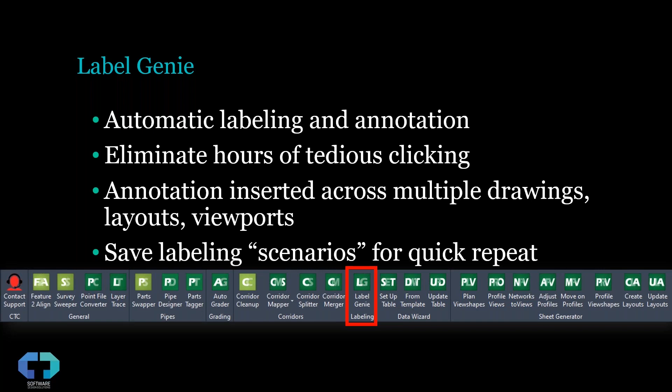You can even save different labeling scenarios out to templates so you can quickly repeat those things, right? So a certain set of hatches that you always apply MText to, maybe line and curve labels or surface spot labels that you always attach to certain surfaces or feature lines or polylines, you name it. We can save all of that into templates for quick repeat.

Another tool called Data Wizard. This allows you to create project-specific legends or QTOs. So a lot of times we're dragging in kind of a one-size-fits-all or just kind of a canned legend, and then we take the time to manually trim those up to make them work, or we just leave that in there and we have a legend that doesn't accurately represent all of our sheets.

With Data Wizard, we can scan multiple drawings at once, or even just limit it to one sheet or viewport and automatically generate a legend for that. It'll account for AutoCAD and Civil 3D objects, and much like Label Genie, you can save templates so you can quickly repeat these different legend types. Whether you're doing sheet-specific legends or one project-wide legend, Data Wizard will handle it.

And the same workflow works great for project-wide QTO. You want to count up multiple different objects across multiple different drawings and then export to Excel. Data Wizard will do that as well.

And the third tool I want to talk about is called Sheet Generator. It's about creating plan and profile sheets. Similar to the native tool set, you might be familiar with it. They're called view frames. And while those are handy to create plan and profile sheets, the big limitation with them is as soon as you create them, they're not dynamic to your project, right?

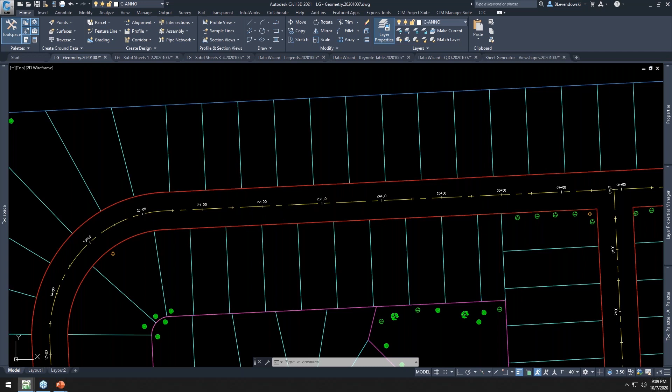And normally we're picking and clicking away on all this stuff, and then things shift or change and we have to do it. So let me show you that first example of that with Label Genie. So here's that CIM Project Suite I mentioned. If I click on Label Genie, it launches an easy to use interface.

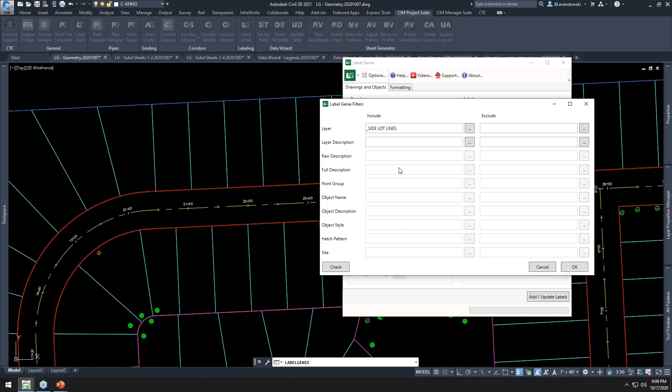I'm going to choose the current drawing. I'm going to label line and curve labels. I'm going to anchor them to polylines, and specifically I'm going to anchor them to polylines on this layer. Okay, I chose those side lot lines, those cyan lines. And so I can reference a set of polylines, many different object types, by layer, by style, by name, and it's going to insert line and curve labels across all of these at once.

With segments, I'm going to do both lines and curves. And then finally on the formatting tab, what styles do I want to choose? These read right from my drawing. Okay, so we're not going to create any kind of proprietary label objects or anything like that with this tool set or any of the tools in the CIM Project Suite. It reads your templates, your styles, your layers, and so on.

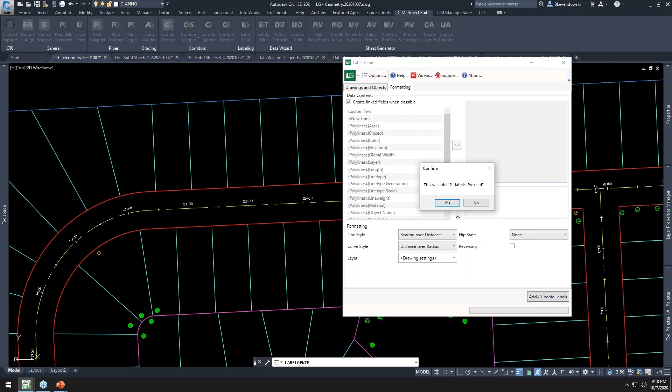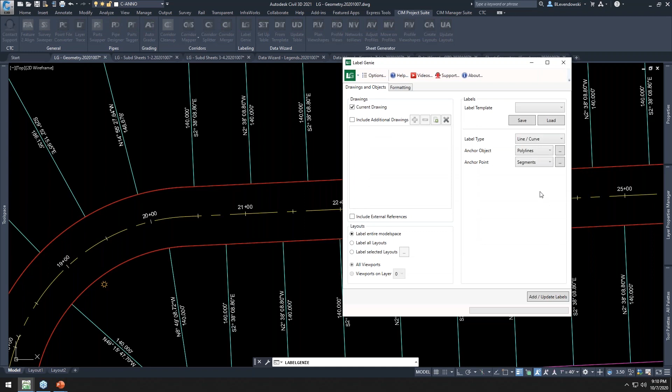So I'll click Add. It's going to give me a confirmation, 121 labels. I'll say yes, and boom, they all come in. Okay. Now you've got different labeling scenarios. Perhaps along the right-of-way, we want to use a different label style. Just grab whatever layer those objects are on, change your style. Let's say you want it to be distance, and then click Add. And all those labels come in automatically as well.

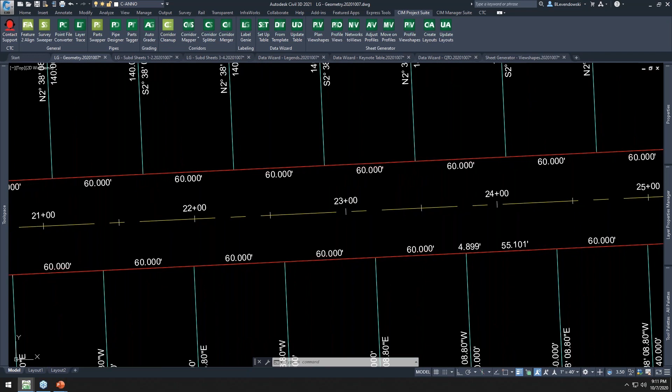Now perhaps you wanted them on the other side, right? This is the beauty of Label Genie. If your design changes, if the labels that you just created don't look quite right, or they need to shift around, or you want to change a style or a setting on them, Label Genie doesn't just create labels, it updates them as well. So I can control the flip state, for example. I'm going to flip all of these like this, but you see there's other examples about flipping towards and away from the centroid.

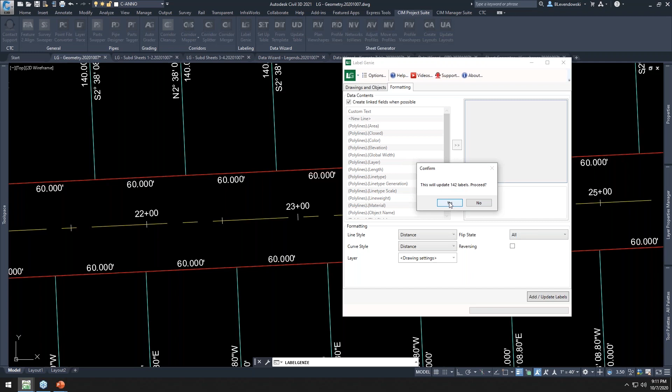I'm going to hit Add. It's going to find 142 labels. This time it's going to update them. I'll hit yes, and now all of those flip to the other side. Okay. With Label Genie, there's tons of different things we can label. Let me take something totally different like assemblies. There's no assembly labels. It's nice to keep these straight with little labels on them, but there's really no way to do that. And so Label Genie will handle this as well.

Let's grab MText, assemblies, but notice all the other anchor objects we can choose here. AutoCAD and Civil 3D object types. And in fact, we've got a big update to Label Genie coming out. This list of anchor objects is going to be doubled so that just about any anchor object you can think of will be in here. I'm going to anchor MText to assemblies. Then I can choose what information to read from those assemblies. I'm going to take the assembly name.

We don't need to make it annotative. We'll make the height 0.2. Choose a display width of 5. And then all kinds of offset options. We'll do a vertical offset of -3. And we can turn the background mask off. But it's MText, so a lot of those properties that you are concerned with show up here. What layers they're going to land on, the orientation, all those kinds of things. I'm showing you one example here with assemblies, but you can do it for all sorts of things.

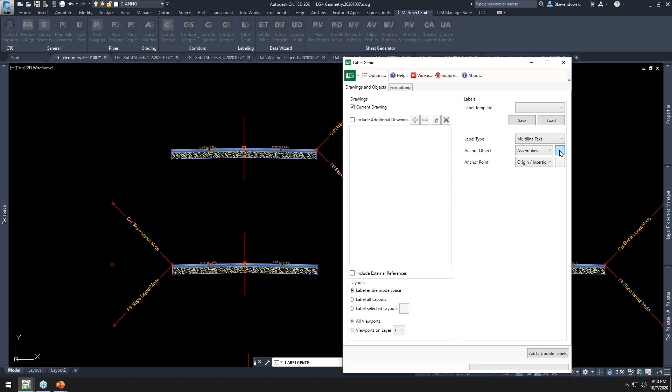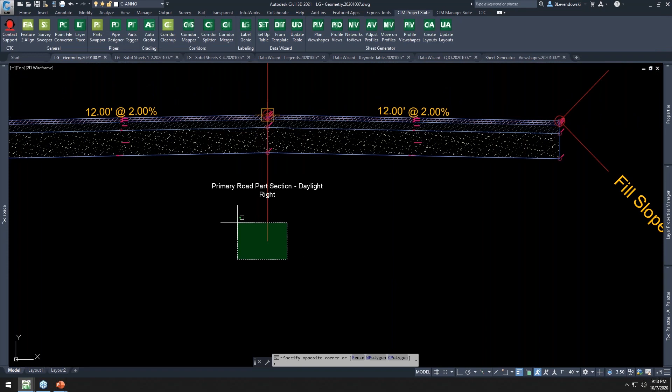I think I've got a layer filter on here. Yep, let's turn that off. Notice it told me there's nothing to label. It's because I was looking for a layer that assemblies weren't on. There we go, 8 labels at once. Boom, everything comes in. This is making MText with embedded AutoCAD fields in it, so it's dynamic. So as the name of that assembly changes, that label itself will change. If this is a different piece of text in there, simply refresh and the labels update. So many areas like this all across your drawings.

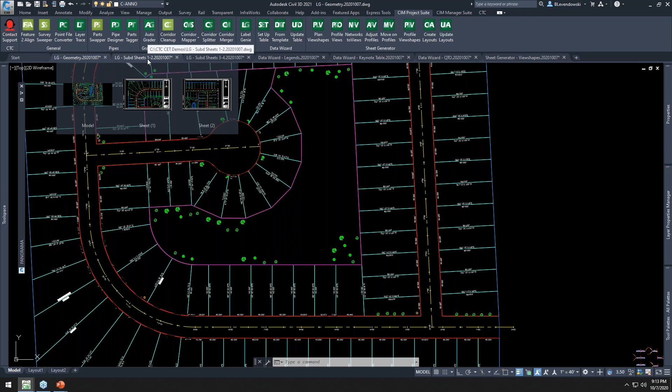Let's look at another example. And let's make it more complicated this time. I want to label 2 drawings at once, and in each of those drawings I have multiple layouts, and I want to label per those layouts. Furthermore, some of my information in these layouts, in these sheets, doesn't live in this drawing, but it's coming through in data shortcuts or in XREFs. This is how a sheet would normally be set up, right? You've got information coming in from multiple drawings.

So you can label in base files or model files like this, or you can go into sheet files and label objects that are brought in through XREF or data shortcut. This is a grading plan. We're going to take that same project scenario and we want to add surface spot elevations and slope labels.

So I'm going to run Label Genie again. This time we're going to choose the current drawing, and we're going to choose an additional drawing. We'll browse out to it. It'll be this one right here, this other drawing I have open, in fact.

Okay, we want to include the XREFs now. And instead of labeling all of model space, we're going to label layouts. We could do all layouts, or we could limit them to the layouts that exist in those drawings. So lots of detailed control on this.

Many drawings and layouts can be incorporated at once. I'm doing a couple here. We're going to have 4 different layouts, right? But what about those long transportation projects? You might have 50 or 60 layouts. You can do all of that at once with this tool.

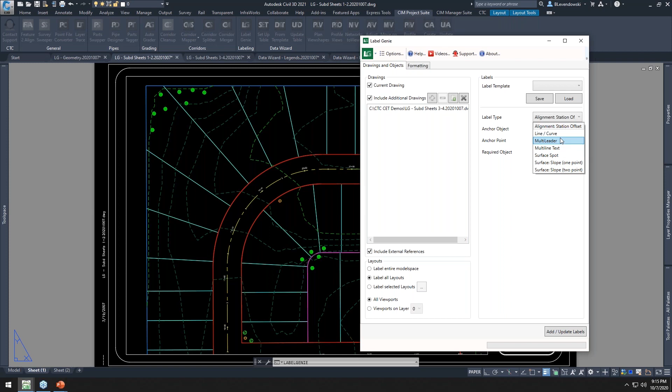Okay, we're looking at surface spot elevation labels, but again, look at all these different label types we can add. With that update I mentioned, we've got a lot more label types coming out soon.

We're going to attach these to feature lines, and we're going to put these on feature lines of a certain layer. Say you don't know the exact layer name, you can put asterisks before and after and just say grab me layers with the word lots in it.

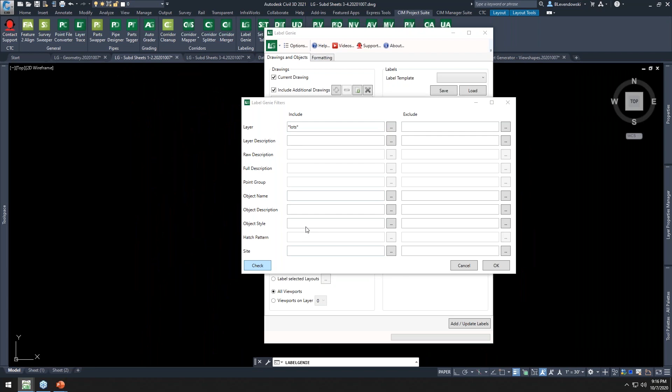And I can even click the check button, and it'll check in my source drawings. Did it find those objects? Yes, 122 feature lines in each drawing.

Okay, we're going to anchor this to the vertices of these feature lines. We're going to do it to all the points except the midpoints here.

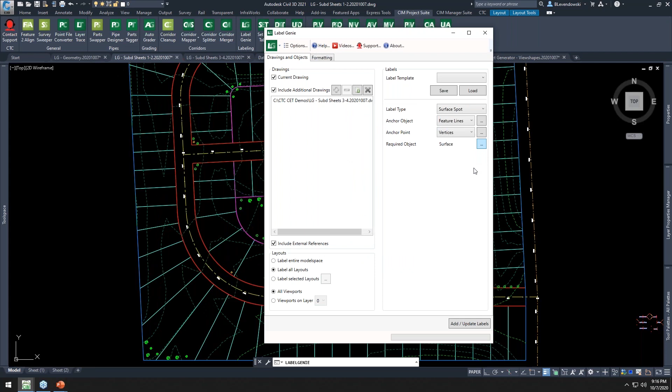Now these are surface spot elevations, so they need a surface from which to read elevations. Well, instead of doing layer filtering, I can do object name filtering and say grab whatever surface has the text FG or finish grade in it.

And then on the formatting tab here, these are just surface spot elevations, so there's no data contents up here to work with, but I do have my styles to choose. So I'll go ahead and choose that and hit Add Update Labels.

It's going to scan through those 2 drawings and layouts and figure out what should be created. Turns out it's 519 labels. Do I want to proceed? I'll say yes to this.

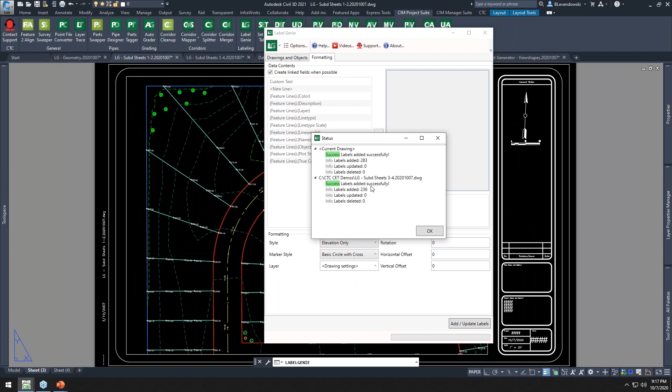So these are surface spots. Think about the work involved to do this, right? You would be clicking 519 times to insert every one of those in each and every drawing. And we just did it at once across 4 layouts and 2 drawings at once.

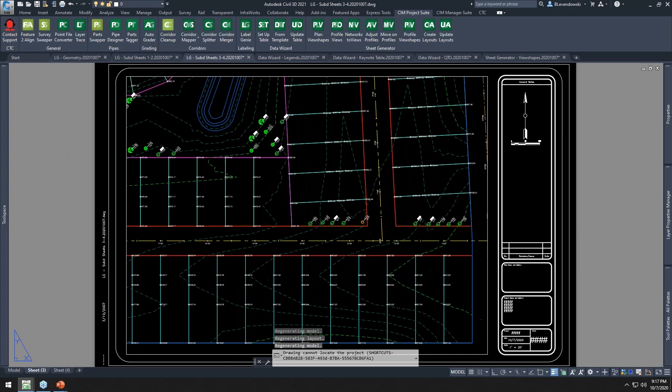I said it was per layout, right? So in this drawing, here's the whole project, but it was only reading the viewports on these 2 layouts. That's why you see only this upper half labeled. Now, if I jump to this other drawing, notice all of these are labeled, and it was the bottom half of the project.

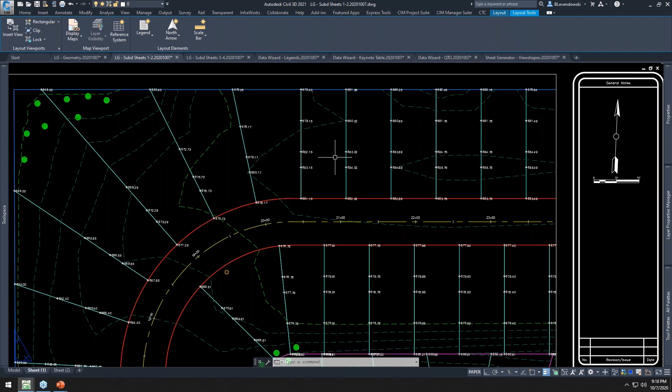Now, like I'd shown you with the line and curve labels, everything is dynamic. Say the grading plan changes, and the high and low points along these lot lines need to shift, you simply run it again. Maybe the appearance or the style on those labels aren't what you want.

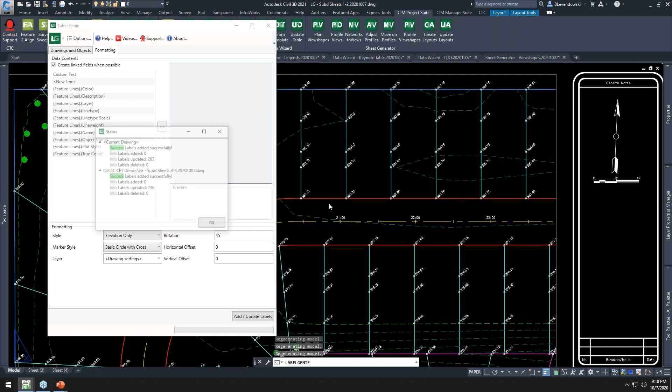Like maybe we want a rotation on this, 45 degrees. Click Add. It remembered my previous settings, so all I have to do is change the rotation value, and now it's going to update 519 labels. And all of those have a rotation on them now.

Okay, we'll do one other thing with Label Genie, and then we'll move on to another tool, and that is to label surface slope labels. We're going to attach them to those same feature lines, to segments, and then we're going to do a percent label. So we want slope labels on all of these grade segments in our lot lines.

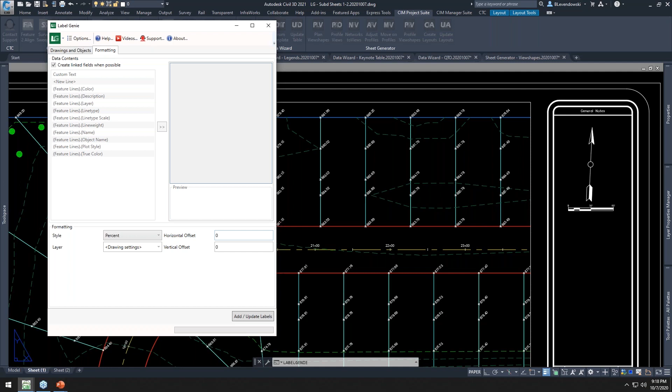I'm going to click Add. 463 labels. We'll click Yes to that, and then we'll see those slope labels come in as well.

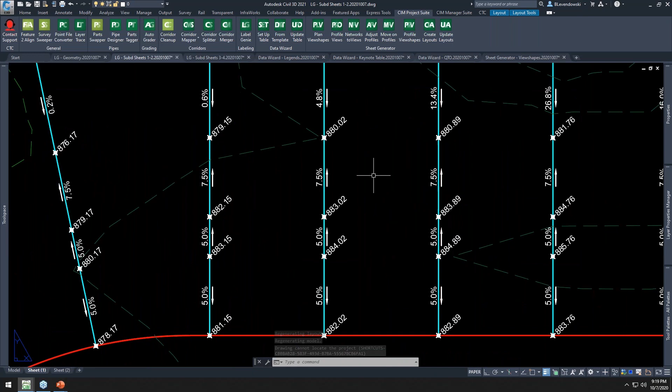Okay, so different slope labels. Same thing again, right? Picking and clicking on each and every one of those. I just did what would probably be an hour's worth of work, 2 hours worth of work. I did it in about 5 minutes. And I was talking you through it, so.

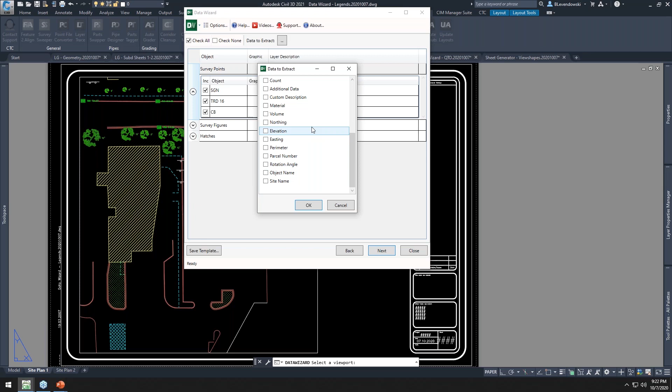But I can pull all kinds of other information out of these objects, QTO information, any kind of tabulations you might want to do. There's about half a dozen different ways to tabulate things in Civil 3D, and none of them do a good job. And none of them do more than just maybe about 10% of the object types that exist in the software. This will do all of it at once and just about any information you want from the object. So legends and QTO are a big focus, a common use for this, but any kind of tabulation you might want to do. I have a lot of customers that do tree tabulations with blocks, all kinds of different things.

If I click next, here is the formatting options. What kind of capitalization? What are the size of the cells in the table I'm about to create? What about the title, the headers, all that stuff? I have control over it.

And then finally, I can write this to Excel or I can write it to an AutoCAD table. In this case, I want a legend in the drawing, so I'm going to do an AutoCAD table and choose my style.

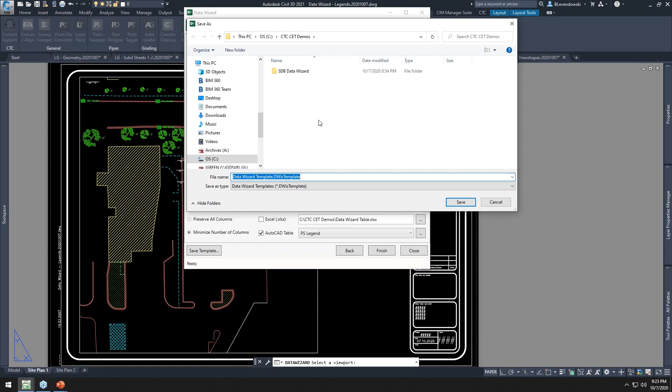Now you may have noticed as I've been going through this, there's a Save Template button down here. What this means is that at any point I can save out a Data Wizard template, and then I can reload that in a different drawing, a different project, and all those settings that I've specified throughout this wizard will all be saved to it, so I can launch it again and create a legend based on these settings, but relative to that drawing or that project.

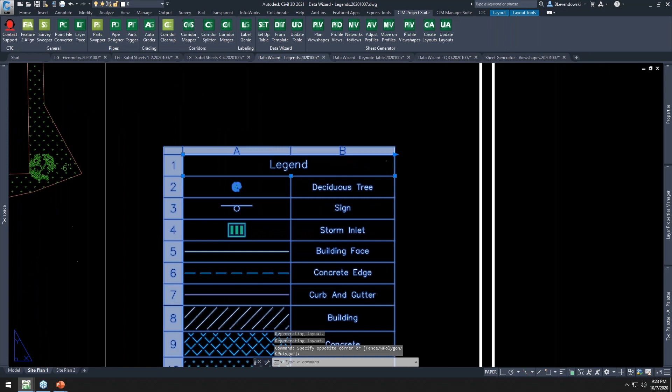So let's click Finish here. We'll create this. I mentioned earlier, none of these tools in the CIM Project Suite create proprietary objects. Same goes right here. This is a native AutoCAD table, yet we've automated the populating of block symbology inside this column. We're reading, in this case, the layer descriptions from these objects, okay?

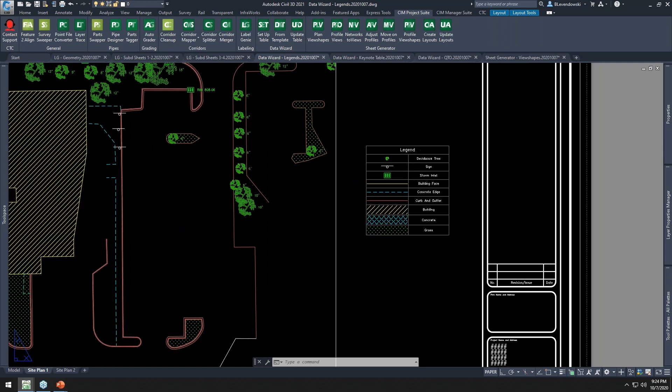And this stuff is relatively dynamic, meaning if something changes in my drawing, let's go ahead and do that one. So let's change, just simply freeze a layer. Okay, I froze the grass layer. And now let's actually make a change to the curb and gutter layer.

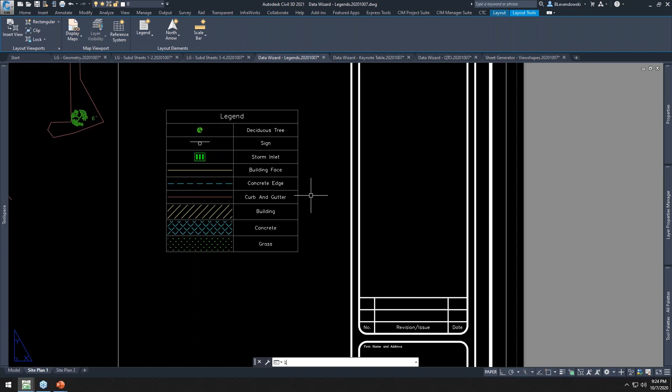So I read this from the layer description, from this layer right here. And maybe there was, I just want to notate it a little bit different. Maybe it's concrete, curb and gutter, or whatever the case may be, okay?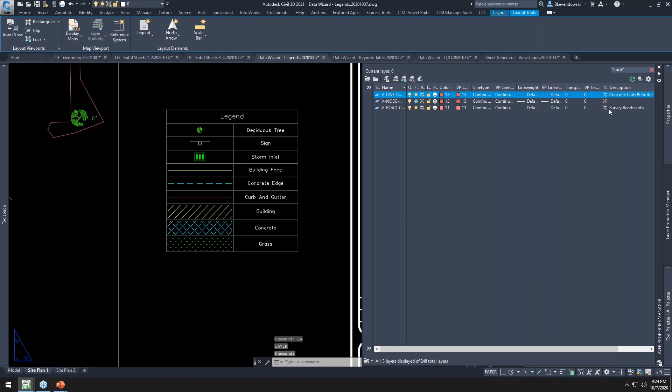Any of those changes you make in your drawing, you simply come back to Data Wizard, run the update table command, pick on your table. We're going to read, write this out to the same AutoCAD table, and we're going to read the settings from the table. So I'm going to hit OK, and you're going to watch as this table changes here.

Okay, there's a new layer description. The grass hatching is gone now. And notice this symbology, everything's to scale—the hatch scaling, the line type scaling, the storm inlets here. Now the tree sizes vary here, so this is taking the default size from the point style, but you get the idea.

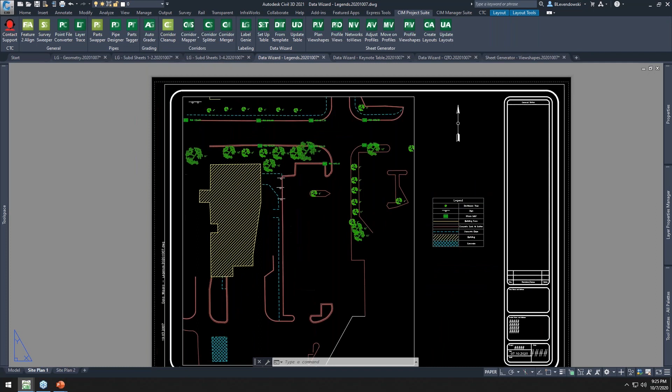Let's look at another scenario. What can we scan for? There's just about every object type in there I've shown you. Think about M leaders you're using as callouts - attributed blocks embedded in your M leaders are a great tool for callouts like this.

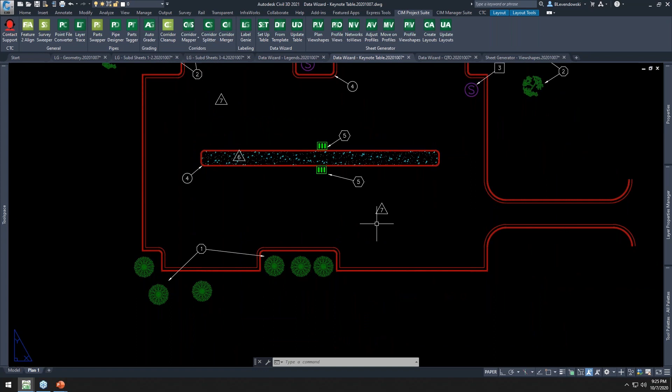A lot of times we want to tabulate the stuff, and in fact in these M leaders we often have descriptions or information about what that object is. If you have all these across your drawing, or maybe you haven't found a great way to tabulate them, you can make keynote tables if that's a common thing for you. Let me show you that.

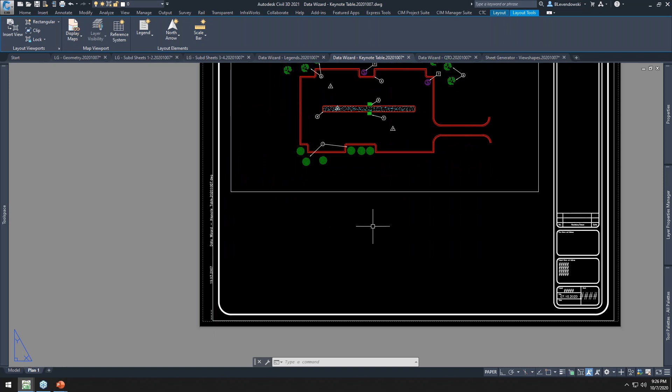I'll run Data Wizard. It works the same way as Legends. I'm going to use this layout, and we're going to choose this viewport. Choosing the viewport not only limits what objects will show up in the legend or table, but it'll also make sure the symbology is scaled to match that viewport.

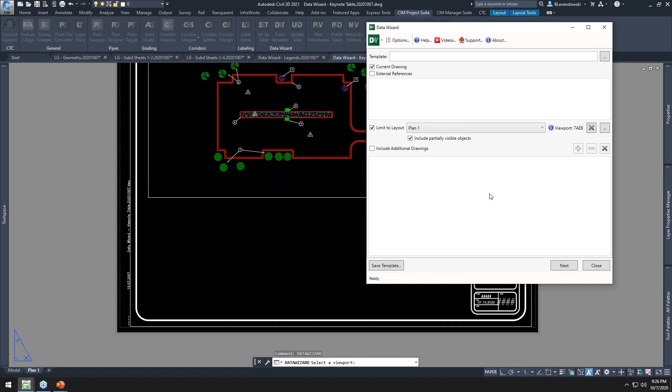I'm going to look for multi-leaders, and in this case I'm going to scan for the graphic - that's just the symbol you see there. And then, as you might have noticed earlier, there's an additional data option in there - that's custom attribute information you might have in your objects.

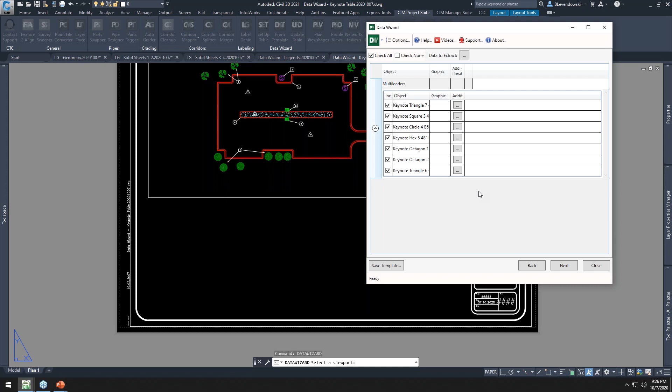I said these were attributed blocks. If I jump into here, it's picking up on those custom attributes I have in those multi-leaders. Now this would work for standard blocks or attributed block multi-leaders, and I can choose information from those attributes to be included in my table.

I could use Civil 3D user-defined properties, GIS object data, or Civil 3D property sets. Basically any information you might have in your drawings, we can read it, we can tabulate it, do anything you need with it. So I'm going to hit next.

On this final screen, we've got formatting options again in here. I didn't mention before, there's sorting options too. And what we're going to do is create a table. Here's a final preview with those descriptions - they're going to come through.

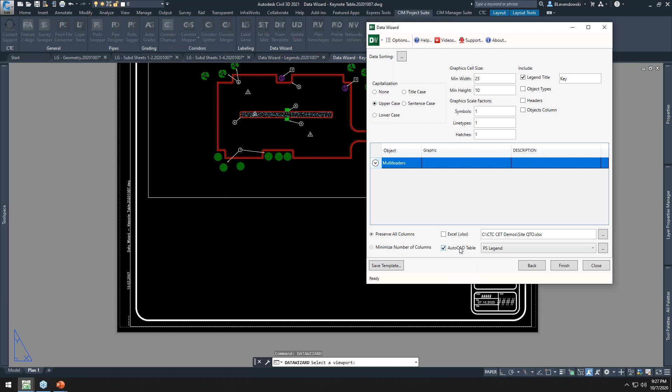We're going to write this out to an AutoCAD table again. I'll hit finish, and we'll drop that right down here. All that symbology comes in to scale.

Whatever standards you have - layer descriptions, your styles for M leaders - Data Wizard will read and use all of that stuff. These are not styles that you have to use. I've got examples set up for this demonstration, but it'll work with any and all of your styles.

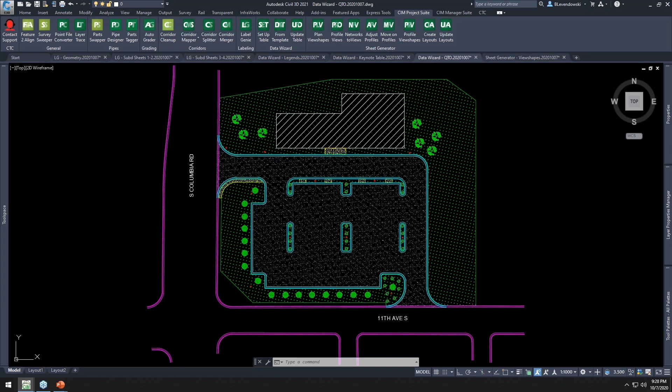This is a table style. If you want borders to show up a different way, or you don't want borders, turn it off in your table style, no problem. I mentioned the QTO - this isn't so much a sheet production thing, but it's obviously a part of the project, and I thought I'd highlight that as well. Here's a simple site plan where we want to count up a variety of blocks.

We have some feature lines for curb, and we've got hatching for seating, for pavement, a variety of things. If I run this again, I'm going to scan the entire drawing, and we're going to grab those blocks, feature lines, and hatches out of here.

I hit next, and here I've got some of that quantity information turned on. So in this data to extract option here, I've got areas, lengths, and count, and that information is showing up here.

Now this is adding up or summarizing all this data, right? So shrubs, we've got 26 of them. But there are options in here for whether you want to summarize or combine items like this, or if you want to separate them - list each entity, like listing each object with the northing and easting of it, for example. We can do separate items like this with a summary or without.

Just as an example, I'll show you what that looks like. In the blocks here, now that shrub row where it says 26, I can expand that, and my table can list each and every shrub itself. A lot of different workflows for that, but I just want to highlight that with Data Wizard we can summarize, or we can list individually all the objects we're finding - summarize or combine, different ways to term it.

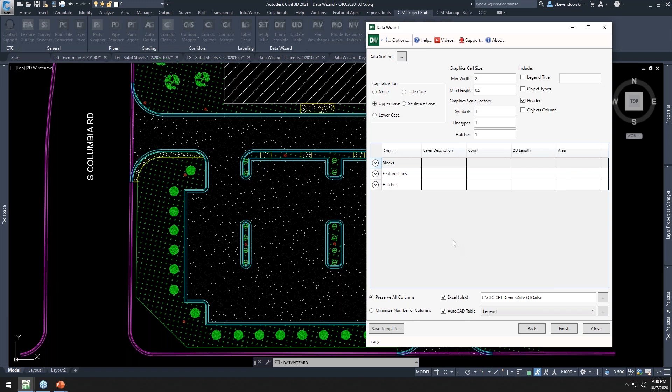We want a QTO, so we want one entry for all the shrubs. And then finally, we're going to write this out to an Excel spreadsheet. Hit finish, it's going to open up Excel for us. Here is that QTO - the count, the lengths, the areas for all those different object types.

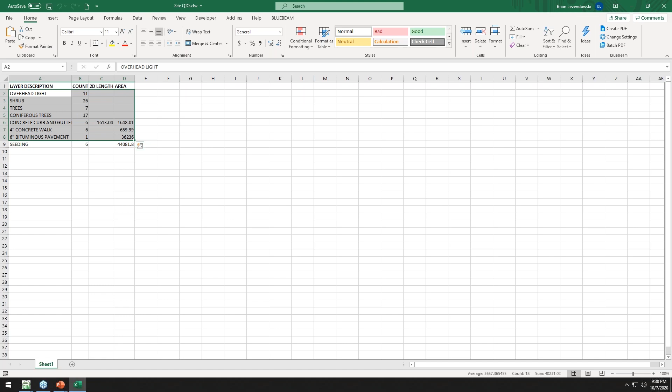I did that on one drawing. You could do it across a dozen drawings at once - count everything up at once, get QTOs really quickly, really easily that way.

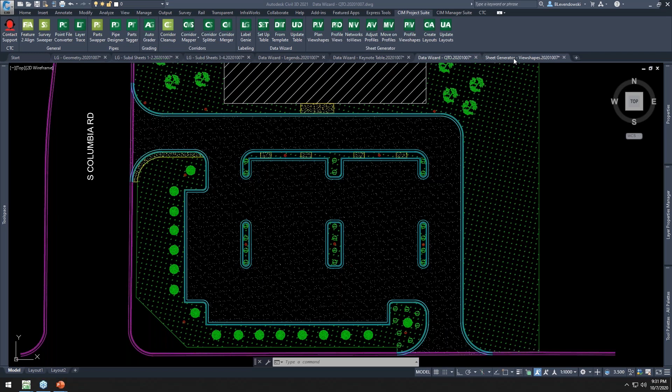The last tool I want to talk to you about is Sheet Generator, and this deals with plan and profile sheets. Now, I mentioned in the intro the ViewFrames toolset. This is a native toolset that will create plan and profile sheets for you, make the layouts, viewports, and all that kind of thing. But there's this big limitation, as I said, which is when your project changes, there's no way to update those sheets.

You just have to delete them again, or you have to manually go update all those viewports, those north arrows on your own. This does one of two things: it wastes a lot of time for us, or it forces us to lock in and stay married to a sheet layout, when it would be really nice if at any point we could simply shift our sheet layout based on any changes in our alignment or the project, or just preferences on how we want to show those sheets.

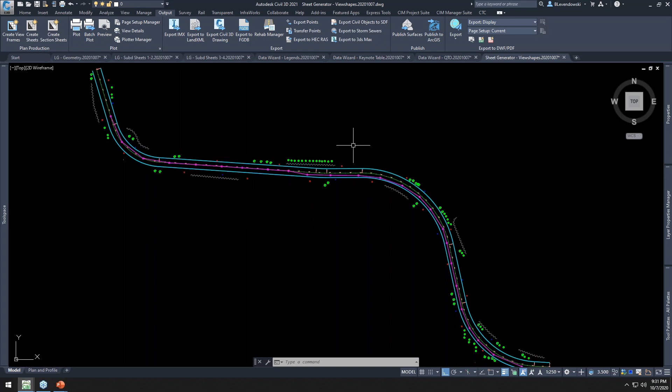So what we did is we created a whole module-based tool set that not only fully replaces the native tool set, but allows you to, at the end, also update those layouts when projects change. So I'm going to walk you through this. There's a lot of different modules to it, so I'm not going to touch on every little setting here, but you'll get the idea of how this works.

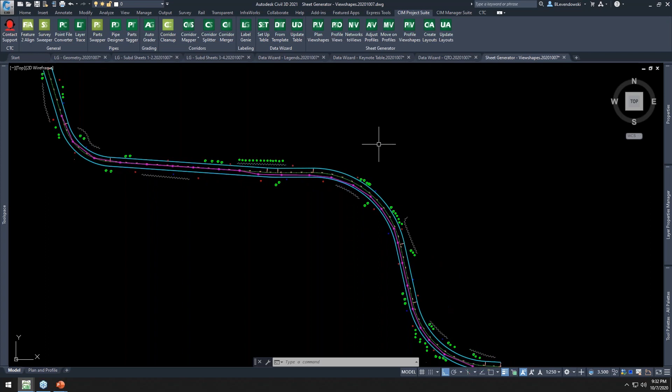I'm going to run plan view shapes. View shapes are what lays out in plan view here, which is going to represent each one of our viewports. Let's choose a starting stationing. Go right here. I'm going to specify a distance between match lines. Notice it tells me the maximum distance. This is based on the size of my, let me back up here, the size of my sheet itself. This is my sheet template.

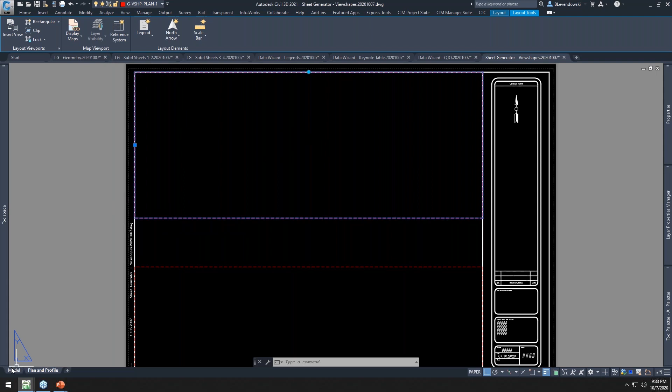How Sheet Generator works is it reads a rectangular block on your sheet template. That's the only requirement for Sheet Generator, that you place one of these simple blocks on here. When we have that, we know how much we can fit on your sheet. We take that block and lay it out along our alignment here. Based on that size, as well as my drawing scale, I know what kind of distance I have between match lines. We can tell it to align or avoid alignment vertices like PCs or PTs that are within 5 meters. I'm going to hit finish.

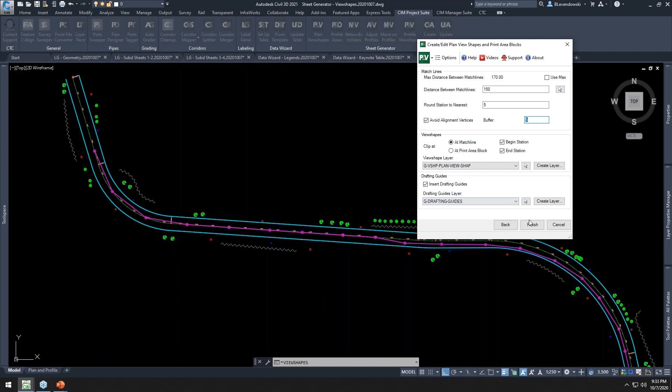Now it lays out all those sheets, okay? Now, if that doesn't look the way you want, you can simply run it again. There was a station shift, it needed to go back like that. Click next, finish, watch this whole thing shift, okay? Shifted it back by 20, 30 meters.

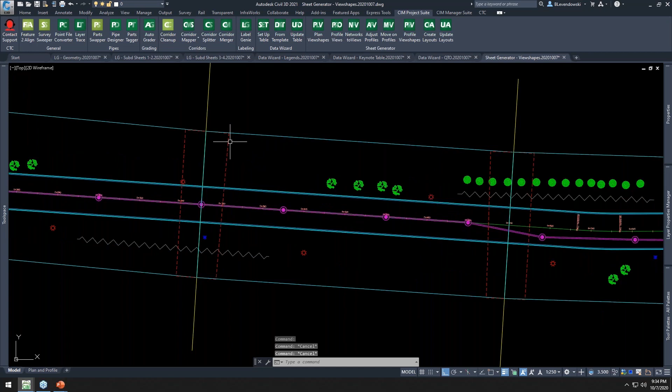These are polylines. This is what our viewports are going to be. This red rectangle is that one I just showed you right on your sheet template, okay? And then these are pseudo match lines, so to speak. The match lines that will actually be created will show up on your sheet. But because these are just polylines and blocks, I can move them around as I see fit. Any kind of little tweaking I might want to do to a particular layout I can do.

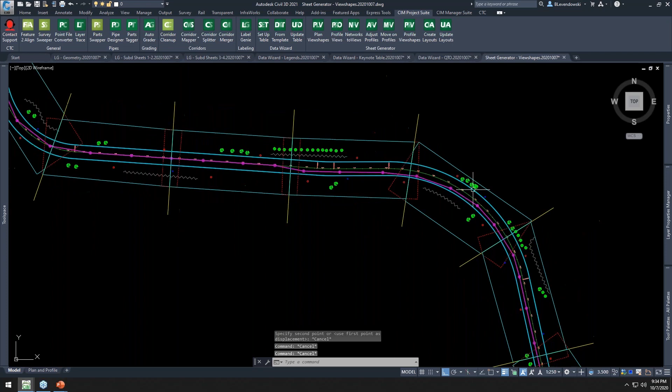Next, we move on to the profile views. This we actually use the native tool set to do. So I'm not going to walk through that, but I'm just going to create my profile views. And then we provide tools to allow you to edit en masse all your profile views at once and basically massage them to look the way you want.

This is actually one of the big complaints about the native tool set, that there isn't enough control on how your profile views look. It's a big limitation. In fact, it's what drives many people to not even bother with the tool set. With Sheet Generator, you have tons of control on this, and I'll show you how right here.

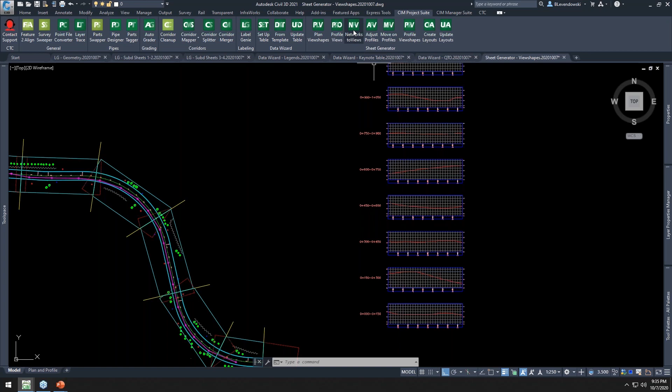Let's run the networks to views command. Let's push all of our pipe networks to all these profile views at once. We like to do this in this tool set because it only adds the pipes and structures that show up within that profile view station and elevation range. Just these few pipes. Makes a big difference with drawing performance, in fact.

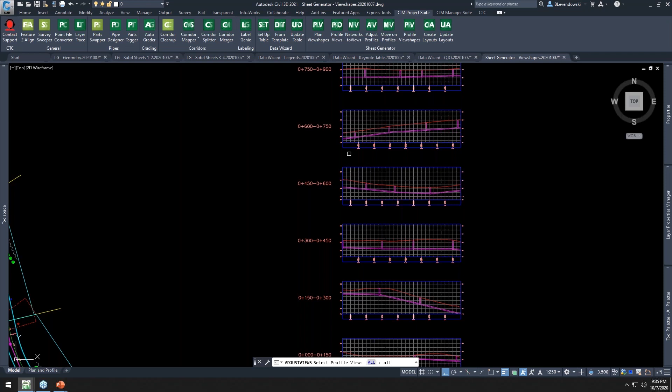Okay, now that we have some of our data in our profile views, I can run adjust profiles. And there's a variety of things I can do. I'm going to grab all my views, we'll load them into here. First thing we want to do, of course, is align the stationing with the plan views. I choose the layer that those plan views are on. And then we have other options here.

What if you wanted to add a 5-meter buffer on each profile view such that it overlapped that 5 meters from one profile view to the next? There's no way to do this natively. You can do it in here easily.

And then the control of your profile view height range or the elevation range, there's really detailed control on this. First of all, I can round the range to match the major ticks or the grid lines in my profile view style. So I don't get this kind of half grid thing right here, right? Like a quarter grid. We can make sure it rounds to the nearest one.

And then I can read different objects in each and every profile and then center it on the median or the highest or the lowest elevation of those objects. I can specify a standard profile view height. We'll do 20 meters in this case. And I could even do a delta up or down, maybe to accommodate for some really deep sanitary sewer manholes or something like that.

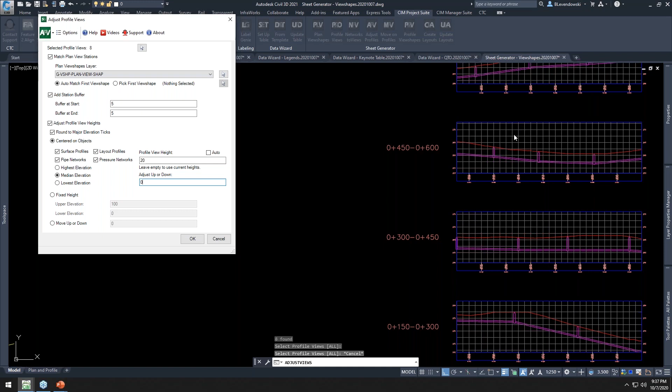I'm going to hit OK to this. And all this tool does, again, is it edits our profile views, but it does a ton of things all at once that would normally be really tedious. You'd have to do one view at a time. So I'm going to hit OK. You'll see these stations change. You'll see everything shift around. Okay, a really quick change there.

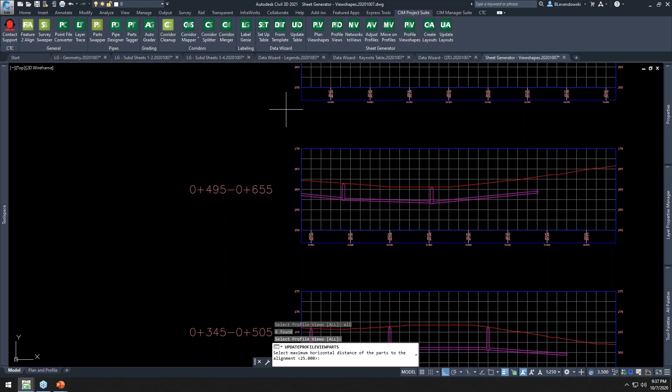Now that was quite the shift to match our plan views. So perhaps there's a pipe or structure that should show up here. This is why we made this a module-based tool set, because I can just run networks to views again, and then all those pipes and structures come in.

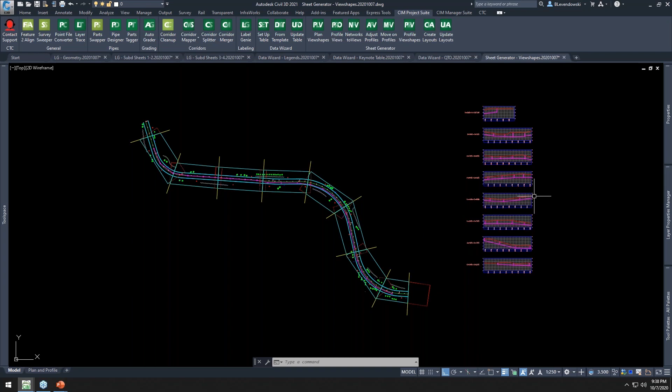Okay. The other thing you'll notice about Sheet Generator is that I get all my profile views and plan views at once before I even created my sheets. This allows me to really understand what I'm about to create before I even make those layouts in the first place. Now we can update them after the fact, but it's nice to be able to see these before.

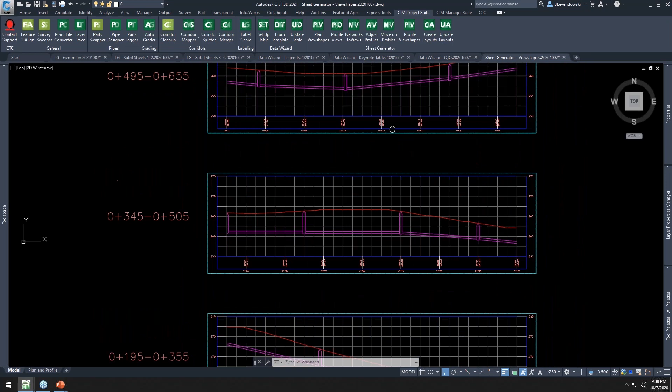So one more step before we run layouts, which is to place our profile print area from our sheet, place that over our profile views. And that's a fairly simple command, but it helps us understand, again, where those profile views are going to fit within our sheets. Okay, finally, we're going to go ahead and create layouts.

We're going to do plan and profile, but notice there's plan and plan. There's profile and profile, plan only, or profile only. You've seen some of these layer and block options along the way. These are just controlling which plans and profile views we're dealing with, so that if you happen to have multiple roadways in your project, multiple different sheet sets, you can control that through some simple layering.

Here's all the layouts we're about to create, the station range for each one. What north arrow, what match line I'm going to use. We actually use attributed blocks for the match lines. And we auto-populate those with sheet set fields. We can even insert profile match line blocks if you have a need for that. Not something you'll find in the native tool set again, but we have that in here in case you need to do that.

And then finally, which layout am I going to duplicate? So it takes a layout from the current drawing. It's going to make copies of this drawing and then duplicate that layout as many times as I tell it to for each drawing. So I'm going to tell it up to 10 layouts per drawing. There's my viewport scale. And then of course, I want to store this into a sheet set file. So we incorporate Sheet Set Manager into this as well. So I'm going to use that one here on my C drive.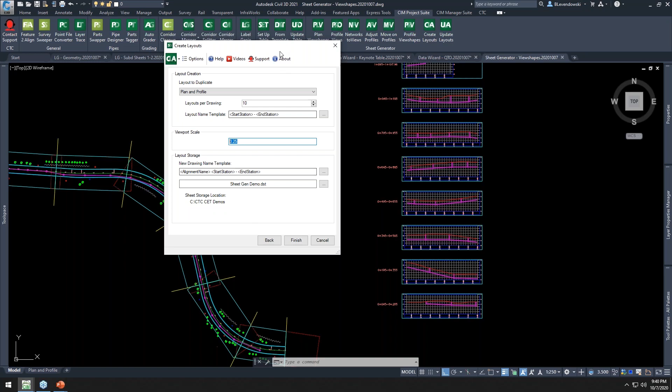I'm going to click finish, and what you're going to see are these layouts be created. It'll take a few seconds. It's going to make a new drawing, and then it's going to generate new layouts for each and every one of these views that we set up already.

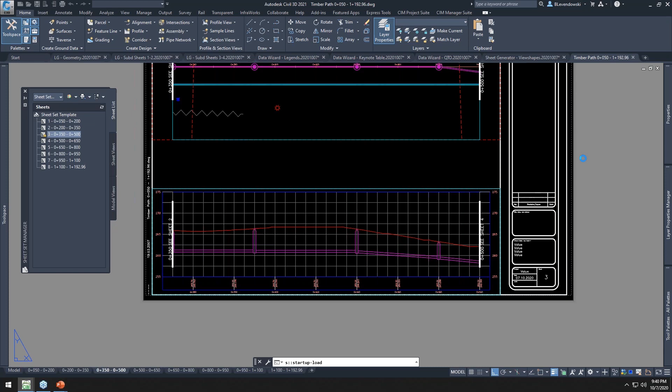And then finally, it loads them into Sheet Set Manager, and it opens Sheet Set Manager for me. I can double click on one of these, open up that file. It brings me right to that sheet. Okay, that's just the native Sheet Set Manager there. And here's one of my layouts. Okay, this is a standard layout. Again, nothing proprietary. Okay, but it sized all of our viewports for us.

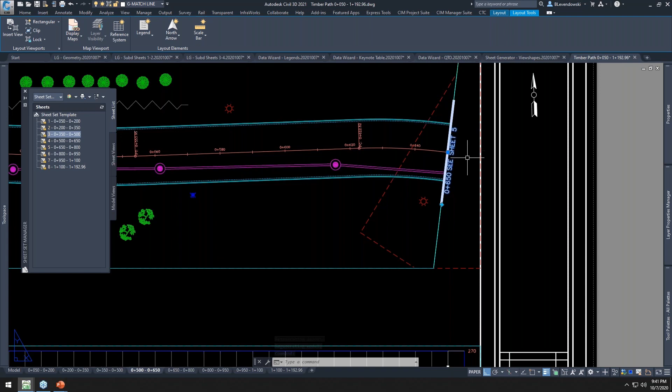It inserted match lines in here. Now these match lines are, like I said, attributed blocks. There's actually sample files we provide with the tools. You can take these, modify these to your standard, whatever you like to do. It'll use your north arrow, whatever north arrow you have, and it'll of course rotate that north arrow.

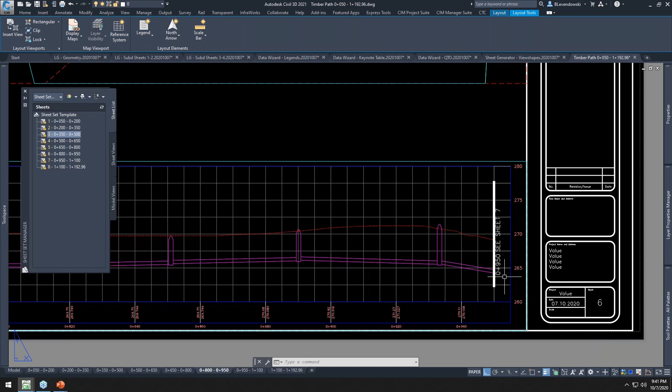And then down here we have profile match lines I mentioned, and then in that buffer or overlap area, we can actually have an insert masking as well, so that you won't see objects beyond the match lines in profile view.

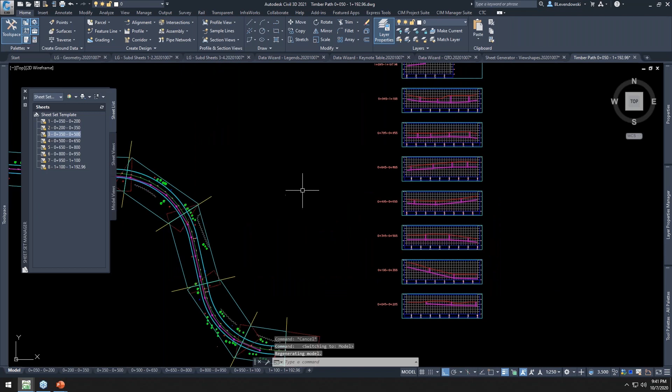All the tabs are named appropriately. All the sheet set fields are named appropriately. Now let's talk about updating, right? Changing things. This is the real meat of this tool. Everything I showed you so far, there's some bells and whistles beyond the native tool set along the way, right? But we just created the layouts. But the real power of this tool is the ability to update this stuff after the fact.

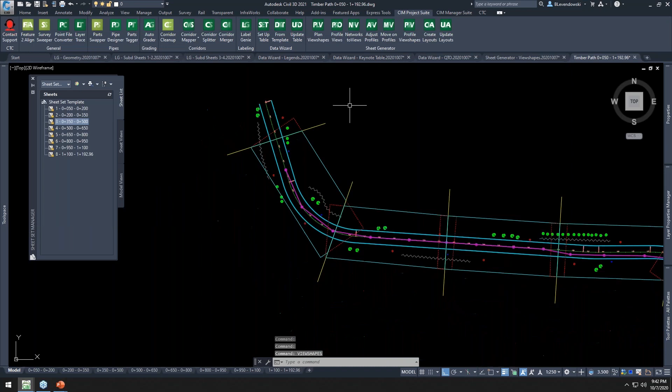Normally you're stuck. These are a bunch of static layouts, but we have control on all these through this update layouts command. And so let's go ahead and make a change. Let's say we had to shift this back again. The start of the project shifted this way again. So let's grab the plan view shapes tool. And now the stationing is to start right at 0. Okay. I'm going to hit next and finish, and then you're going to see all of these shift again.

Okay. So now my project, my sheets need to start right there. And right off the bat, we're going to see if we look at our layouts, everything is off, right? The viewports are not looking where those plan views are. So we know we got a bunch of work there, okay? But here's how easy it is with Sheet Generator. You simply make the changes you want in plan view. Okay, there could have been an alignment, stationing shift, anything.

You come over to your profile views, you run adjust profiles again. Click all of those. You'll remember your previous settings, just hit OK. Everything will shift, okay? And then run profile view shapes to make sure your views are placed in that print block such that the starting stationing, or the ending or the middle lines up with plan and profile view. That's what this is about here.

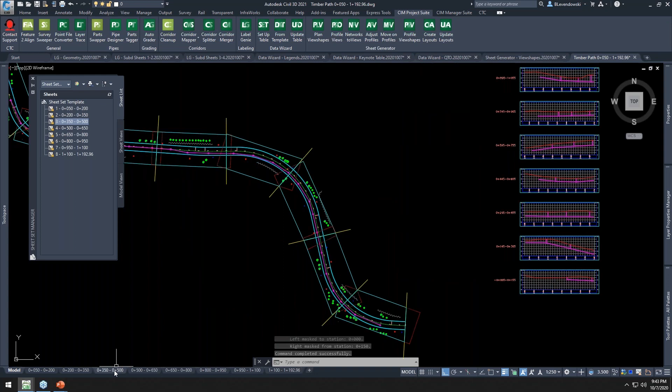Okay. Now everything's updated in model space here. I simply need to push this to all my sheets. So my north arrows re-rotate, my viewports update, my sheet set stationing and match line stationing updates. Okay, right, this is a small sample project, but we've got 8 different layouts here, all that would need to be deleted

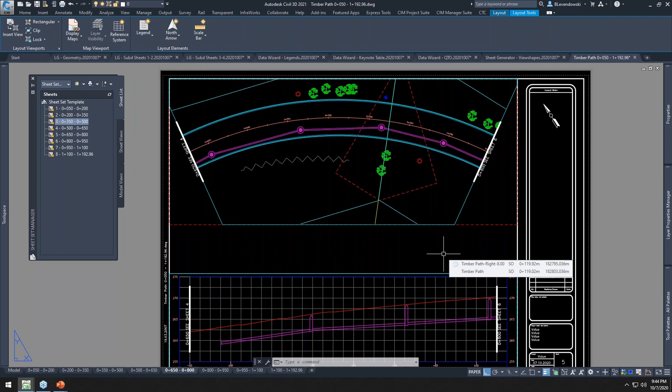or manually edited. And the issue with deleting them is, right, you end up doing a number of sheet edits. You might put some paper space tables in here with Data Wizard, that kind of stuff. You don't want to just delete that stuff. Once you create your layouts, it's nice to be able to just manage them and have them update as you need. So let me show you this final step here. We'll run update layouts.

Again, we're updating plan and profile sheets. Here's some of my block and layer selections. My north arrow and match line blocks, okay? So I could actually choose to, at this point, insert a different match line block if there was a change, right? That's why we give these controls along the way, even for the updating.

And then on this page, it tells me the new station range between my match lines, and then the layout name down here that it's matching up with. Now you can override these, but 99% of the time it does a good job of matching everything up. And then finally, it's going to update all the fields in our sheet set. So I'm going to click finish.

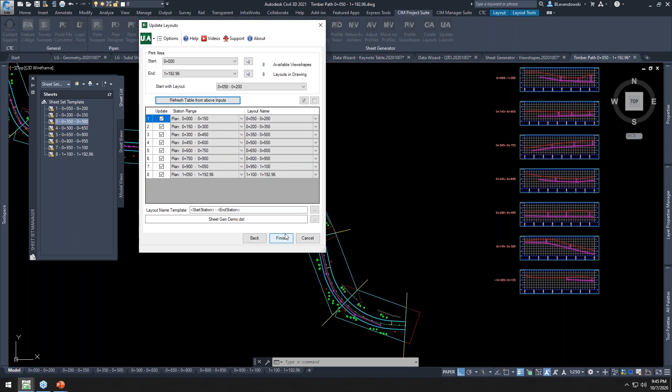You're going to see a lot happening. It's going to move all those viewports and north arrows. It's going to rename all of these tabs. It's going to update all the sheet set fields. Let's go ahead and hit finish. And we'll see that happen here. Those viewports shifting.

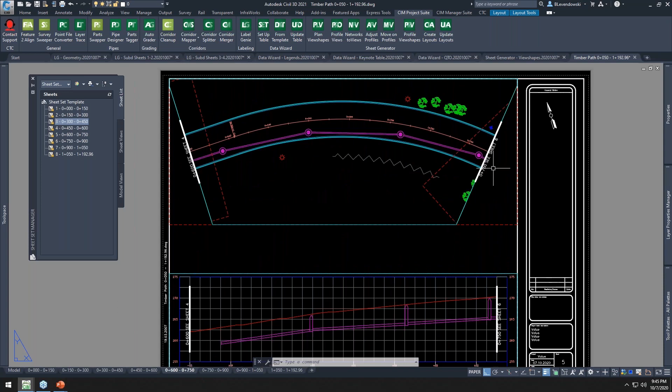Match lines, it happens pretty quick. That's kind of the point, right? You don't want to waste time doing this stuff. We want the software to do it for us, okay? So here's all those updates. Updated stations, sheet references, okay? Like I said, these are attributed blocks, and within them are fields that read from the sheet set, okay?

So that is Sheet Generator, and those are the 3 main tool sets that we have that are geared towards sheet production. But there's a whole lot of other tool sets in the CIM Project Suite.